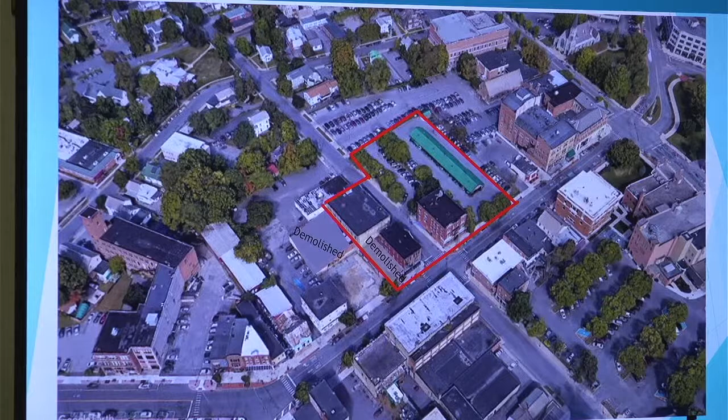And I know that my pointer does not work - oh, there it is, working tonight. This building, this one, and this one - these 2 have been demolished, but these 3 buildings are all part of this redevelopment square in the city.

So a little bit of history for the project at South Street: DRI initiative funds were awarded to South Street for a mixed-use initiative in the amount of $1.2 million. In May of 2021, the city selected Finaccio Spring City Development as a developer for the DRI. Over the course of months that followed, a development agreement was executed for the project that really represents that the project elements designed for purposes of the award are actually going to come to fruition based upon Spring City's plans, and that's the agreement with the city to do that.

We commenced our application period with the filing of IDA benefits and land acquisition from the LDC. We also have submitted for site plan review.

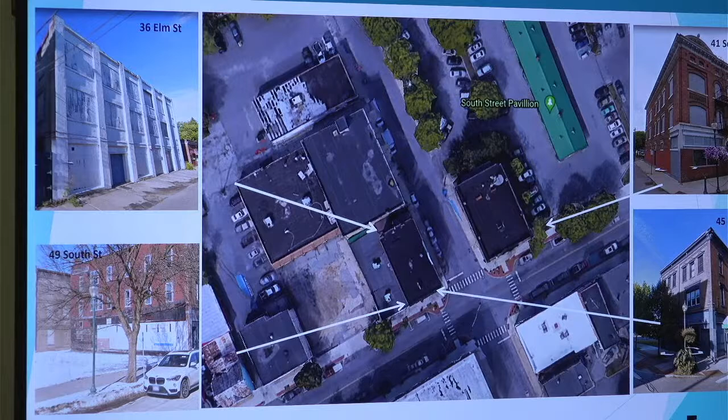We had our first meeting with the planning board on July 5th, interspersed with our zoning application. What we have here is really two sequential phases: the first is rehabilitation of existing buildings, and the second is the erection of new buildings. These are dividing lines for us as opposed to the boards of the city, but it helps orient the fact that 36 Elm, 49 South, 45 South, and 41 South are all part of phase 1, all zoning compliant, all part of the redevelopment into mixed use. We'll go through those quickly.

36 Elm, known as the Incubator Building, is about 16,000 square feet. It's a 3-story steel and timber frame structure that will have commercial on the ground floor - we're working with the city of Glens Falls for that community space - and apartments up above.

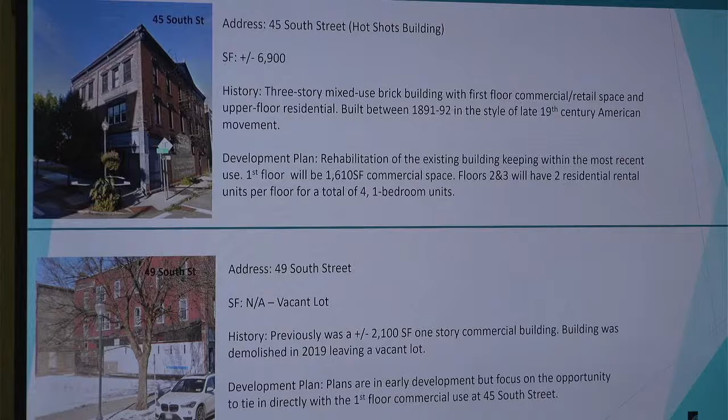41 South, known as the former Sandy's Clam Bar building, is the same type of concept: restaurant or retail use on the main floor with apartments above. 45 South Street is the Hot Shots building, containing about 1,600 square feet of commercial space on the main floor with apartments above. And 49 South Street, which was recently demolished and is now vacant, will serve as outdoor patio or extension space of 45 South.

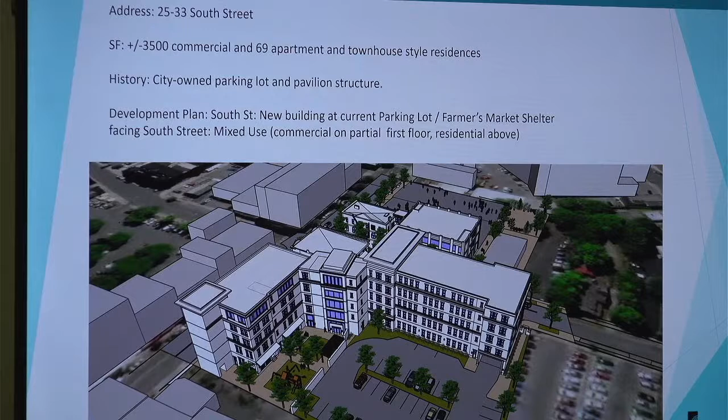What you can see here is the overall neighborhood rendering that will also contain 25 to 33 South Street, which is why we're here. We call this phase 2, even though the sequence is really happening all at once - we're doing this all at one time. You can see this is the lion's share of the new structure on the site at 25 South Street.

So here's what the block looks like. I showed it to you before in the red box, but here's what it will look like once redeveloped. In the foreground you can see that's the new city space. We haven't placed the new pavilion on the site yet, as I know the city is currently in discussions with its architect, but that would be the location.

The attempt here is - this is the pavilion space, the overhang space that was 41 South - you can see it's going to function as flow space into this building and this building, as well as a walkthrough and pedestrian access. You notice the new urbanism elements here, mid-block connectors, attempting to allow for pedestrian walkthroughs rather than corner off the blocks. This building again is a rehabilitated building, and this central column connects the two apartment buildings, one with ground floor commercial and the other without, which is why we are here.

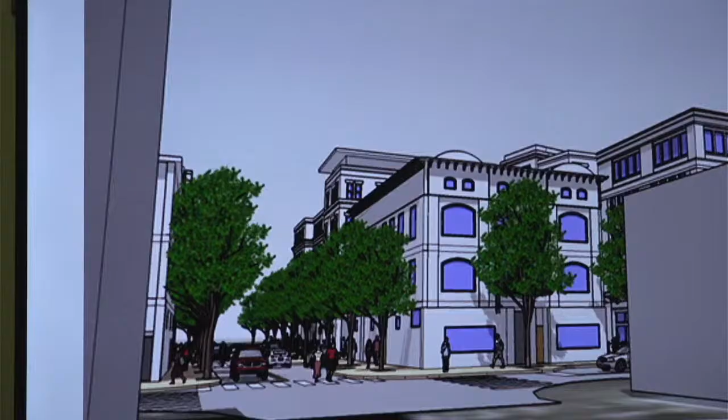Just wanted to give the board the opportunity to see the mass and scaling of the project and what it will look like. There's been such tremendous work in Glens Falls on Ridge Street and Glen and upper parts of South. This is really the last corridor to bring the vision of the revitalized downtown Glens Falls down the South Street corridor. But the part that makes this particularly unique, and why we're here, is that South Street, while a commercial corridor, begins to step back to mixed use and residential as you move down Elm Street.

So this is what we're going to be talking about tonight - those things in our experience that make commercial development more challenging. There are elements about the way this site is set up that will make it necessarily more challenging, in fact likely impossible to do.

These are some of the pictures, and I wanted to pay attention particularly to this one. Because the lot is so large, it's all in one zoning district, but you can see the inner courtyard of this building is going to be residential with a playground and common space, grills and outdoor areas, as well as the parking lot for residents. You can see the pull-through - it's segregated a little bit from this busy commercial sector for privacy reasons.

So just moving through some of the renderings to get to the elevations - here you can see the ground floor design of the buildings are all slightly different. These are what we call the flats, so those are first floor apartments. And you can see here, uniquely, there's the commercial - let's move to the next slide.

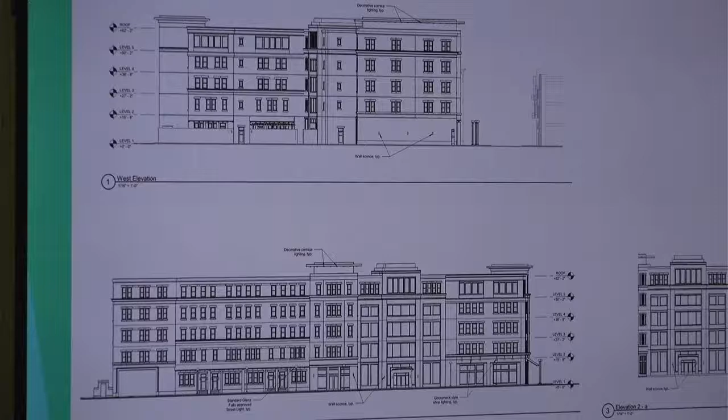So the relief that we're requesting tonight is actually from 2019 zoning code that has a restriction on mixed-use composition of its buildings for first-floor residential. We seek a variance of 4,166 square feet. That's a little bit different than the application because I received confirmation from the architects this morning. They calculated some of the common space.

This is actually the number that they're arriving at, and we're asking for that out of a total ground floor of these phase 2 buildings of 12,523 total square feet on the ground floor. But it should be noted that the overall project contains 20,866 square feet of first floor space. So very, very large two-block redevelopment.

So what we're asking for is that the board look at this as it was released as part of the RFI, or as a response to the DRI, which is a total block revitalization as opposed to a single lot, because it is being brought to the planning board and to the city to be reviewed in its totality.

So the 5-part area variance test that I wanted to go through tonight was whether there's an undesirable change in the neighborhood, whether the benefit could be sought by some alternative feasible method, whether the variance is substantial, whether there will be an adverse impact on the physical or environmental conditions of the neighborhood, and whether the difficulty was self-created.

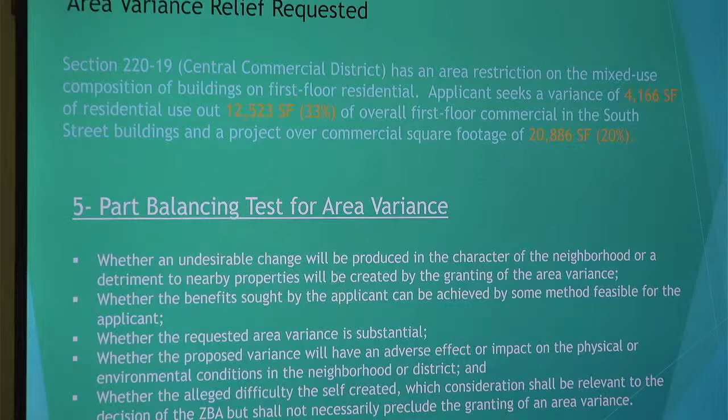That 5-part test comes from New York state law and is oftentimes codified in the local zoning code, and it is here as well. So here is what we call phase 2, but the total ground floor square footage is 12,523, as I mentioned. You will see that the commercial use is highlighted in bright red.

And part of what's being asked for is on the back side, not the front side facing South Street, but the back side that circulates in the inner private courtyard of the apartment building, would in fact be townhomes. So 2-floor, those nice side-by-side entry doorways with a main living room in the apartment, or the sleeping quarters up above. And that will also be mirrored on the Elm Street side as you push back into some of those residential areas, I'll show you in a minute.

That dark yellow hue is the 2-floor townhomes. Again, the interior courtyard on the back side of the building, that light yellow, is the flats area. But again, that being done to create privacy for the playground and the grill-out areas and those types of things, where we're orienting the commercial uses to the South Street side where they'd most be common.

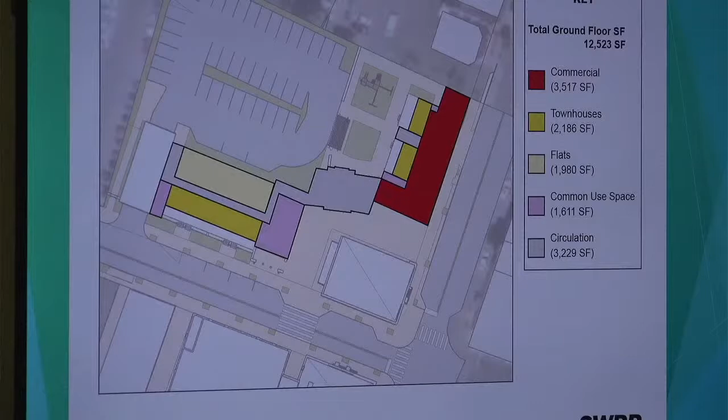As you look at the overall multi-block overview, you can see what we're trying to do here, which is, if it's highlighted in red, it is commercial ground floor. So this block itself has a lot of commercial square footage. And you can see that as we move down the block towards the other residential neighbors or the mixed-use neighbors, as well as the interior courtyard, is where we're trying to balance the uses with what's most appropriate and what we think the residents would be most appreciative of.

What would it look like if this board were to grant this relief? Is this. So it really does, I don't know if you can see when I change the square, so if I feel like I'm on Sesame Street, pay attention to the blue square, it changes. So it's in there. And you can see that we really did pull that red on the South Street side and then try to mix the mixed use back to where it belongs.

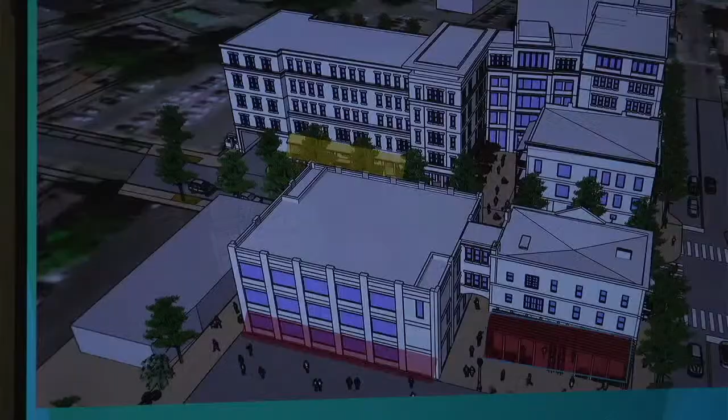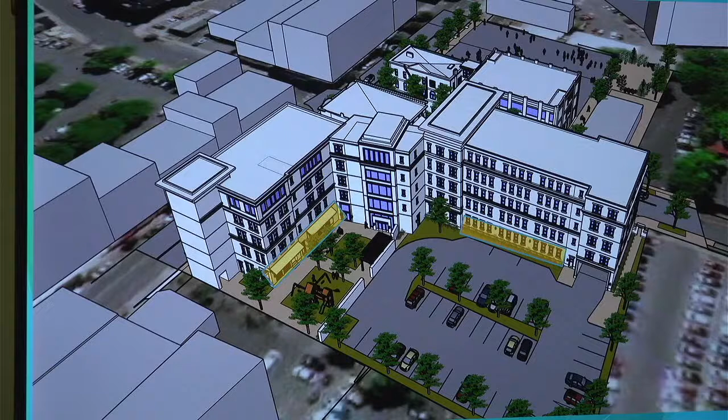I want to come back to this for a minute, and I want you to think about commercial landlords. Commercial landlords, particularly in retail, won't go into office space because that's in a whole different column these days, but retail and restaurant spaces, they want foot traffic. They want to be able to have people who would otherwise not see them or are not familiar with them to stop in and become a patron. These interior-facing facades of the building will not lend themselves to that, which will create an additional challenge of being able to attract the tenant at a price point necessary for that type of use.

So these are the types of things, and as you go up Elm, the same, it's outside the commercial walkability, it's moving down toward parking lots, residential and mixed-use areas. It will be even tougher to fill, and I wanted to make the board aware that this project already has its work cut out for it, filling about 11,000, almost 12,000 square feet of first floor commercial. So this is not a request for an all residential project. This is a request for a portion of it that really does make sense for purposes of the market and frankly what people will lease out.

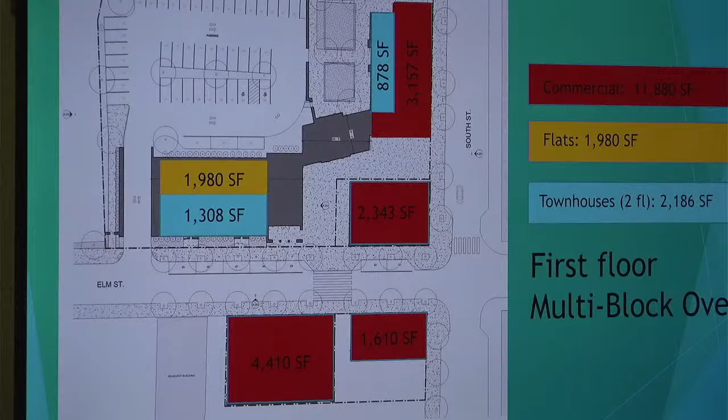So I thank you very much. I'm happy to answer any questions and move to any slide that you think would be helpful. So thank you. Questions?

Well, first I'd just like to say I think it was a very good presentation, and you made your case. The only portion that I have concerns with personally is going up on Elm and the townhomes there. I totally understand the internal aspect where you're having the townhomes and the residential facing the parking lot, and I understand the challenge of bringing traffic back into there. It's going to be a bit of a conflict of traffic into that parking lot, which I don't know if it's dedicated for that only. If that parking lot is dedicated only to commercial, and then you're eliminating the commercial, you're creating kind of an island in that parking lot. Like who would use it?

Right, it's not exclusively for commercial. It's definitely for the residences as well. And there's also these 3 new parking spaces, which, believe it or not, have been designed because of the advent of DoorDash and delivery services and all the types of things that are really cutting down on vehicular traffic and parking. Those 3 spots will be dedicated to drop off for the residents, people who want their groceries delivered and who need delivery from Target or Hannaford or any of those things.